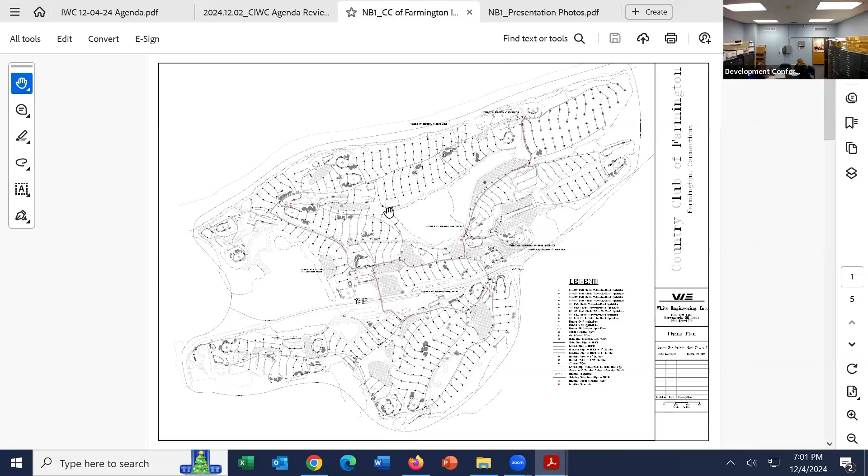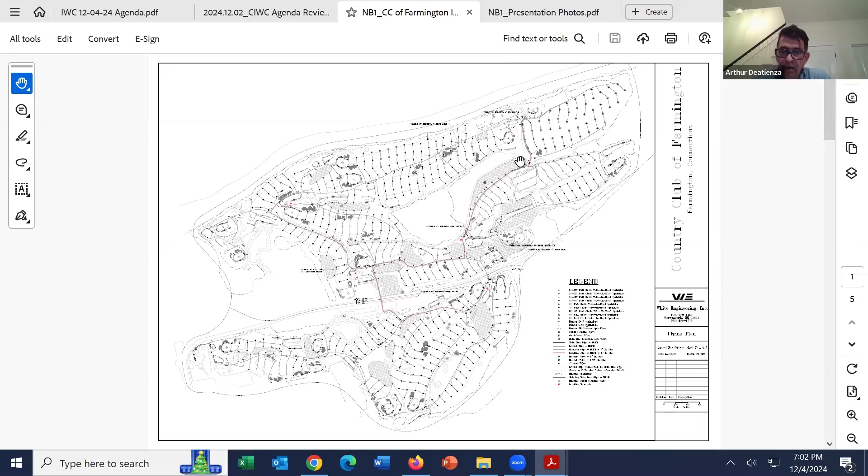So we're just here to revisit some of the questions that were asked about the footage. On the river side of the road, there is approximately 16,600 linear feet of mainline piping that would require open trench excavation. About 3,400 feet of it travels together, you can see two lines traveling together along 15 and down towards the river. For that 3,400 feet, one trench will accommodate both lines, and that's the majority of the big pipe on that side of the road. The rest is all 4-inch, pretty much, with the exception of a little bit of 6-inch existing pipe on that dotted line that we'll reuse.

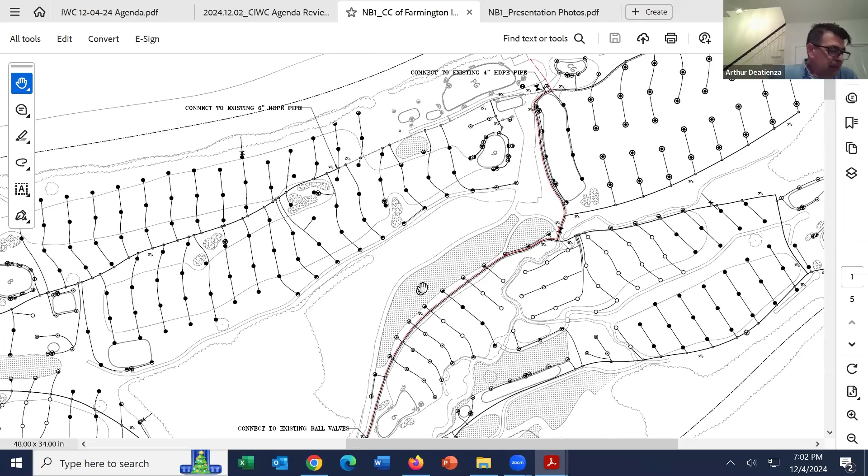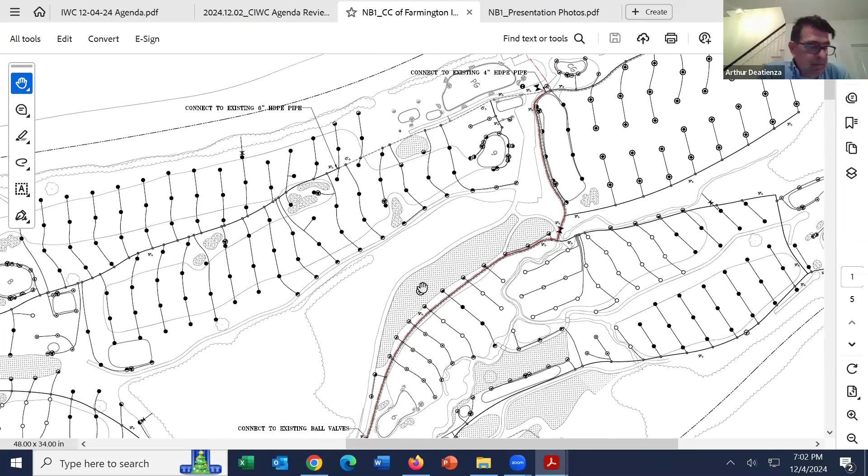Then there's about 30,000 feet of 2-inch piping that would be installed using a vibratory plow, so that's not going to have an open trench. I don't know if you remember the pictures of that process, but it looks like a little incision through the turf. That's the open trench, and then that's the vibratory plow. So we'll dig a start hole, and then you'll see the little incision going across, and then we'll hand dig for the sprinkler heads that go on that.

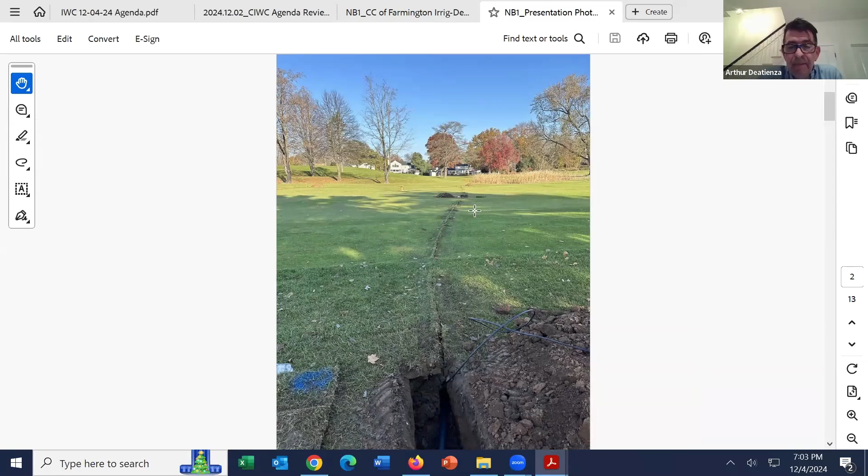And then for the stream crossings, or the drainage swales, I should say, they're about 20 feet on average across, about 18 inches wide. So in total, with the 5 crossings, we estimate that to be about 150 square feet of disturbance through there, and that'll all get restored to exactly the way it looks right now.

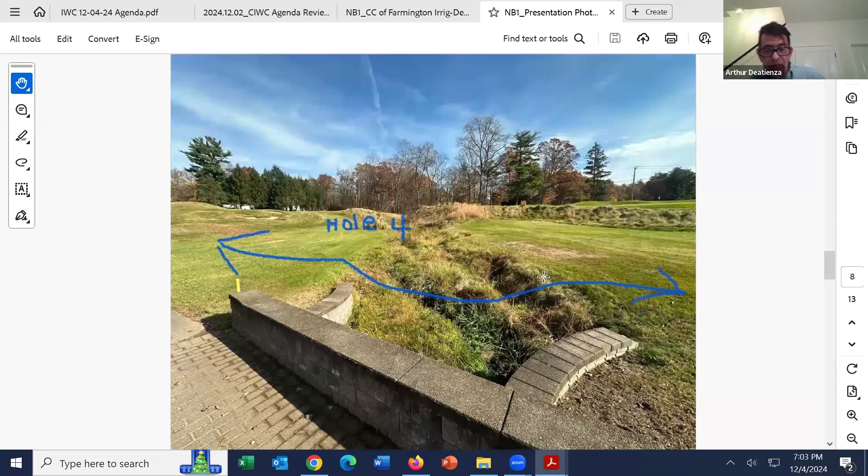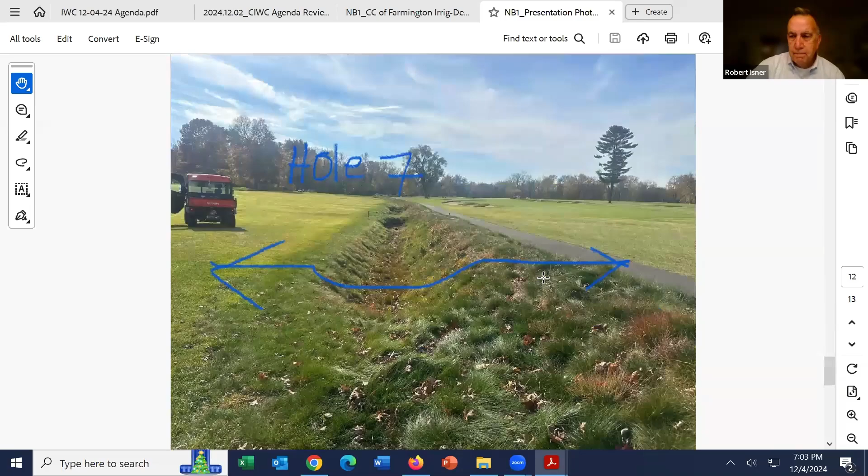Thank you, Art. Is that the end of your presentation? Unless there's any other questions or anything that you need, that's really all that I have.

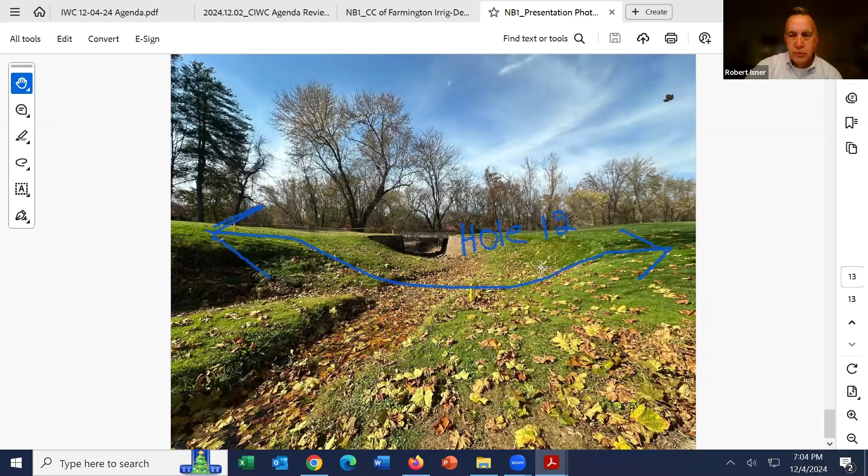Okay, we'll go around and check with commissioners to see if there's any questions. And before I go around, schedule-wise, I guess it's good that there aren't any golfers out on the course right now. Is the winter going to create any problems schedule-wise? I hope not, as long as the weather stays reasonable so that we can be in the ground. The weather, we were wetter now than we were, sadly, but there's still no water in any of them to speak of. But we would like to get that big pipe in as quickly as possible, just given the fact that I've seen it underwater so many times before. I would like to get out of that wet area as quickly as we can.

Thank you. I'll go around and check with the commissioners to see if there's any questions, starting with Commissioner Berlandi. No, I don't have any questions. Thank you. Commissioner Kelsey? Nothing from me. Commissioner Simons? I have no questions. Okay, Commissioner Simpson? No questions.

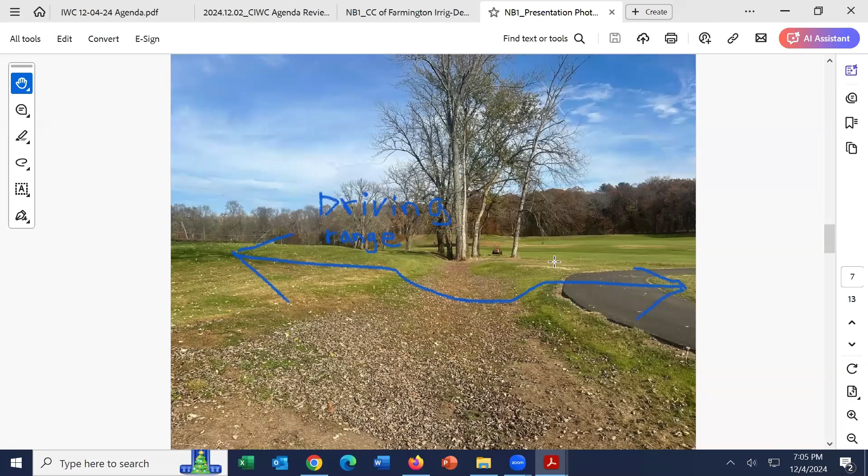And Commissioner Tulin? I don't have any questions, but if the course was open, I am a golfer and I would be happy to go play, but I don't have any questions. Could do an inspection, you know. Okay, maybe so, next spring we'll see.

With that said, I think it'd be appropriate, and there's no expressed concerns, other than the fact that the scope of the project did require the application. I would gather the sense would be a motion to approve with the conditions that work occur during low flow periods when possible, and to keep the staff apprised. Is there a motion of that nature or otherwise?

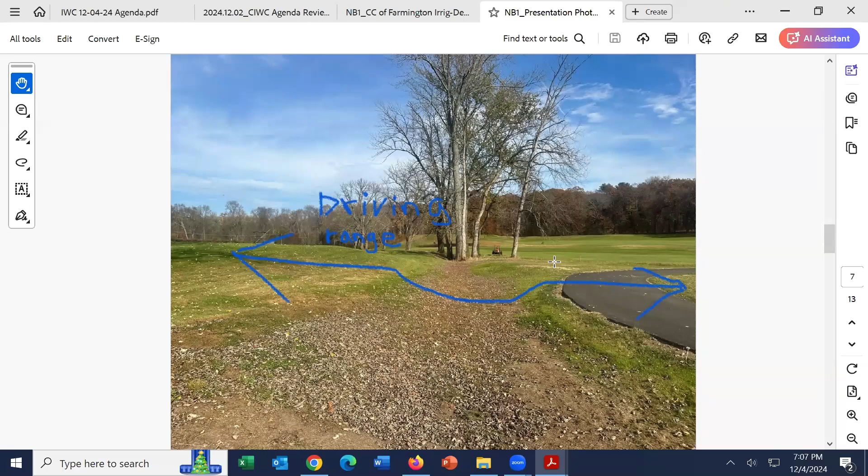Seconded by Rich. All those in favor signify by saying aye. Aye. Opposed? Motion carries.

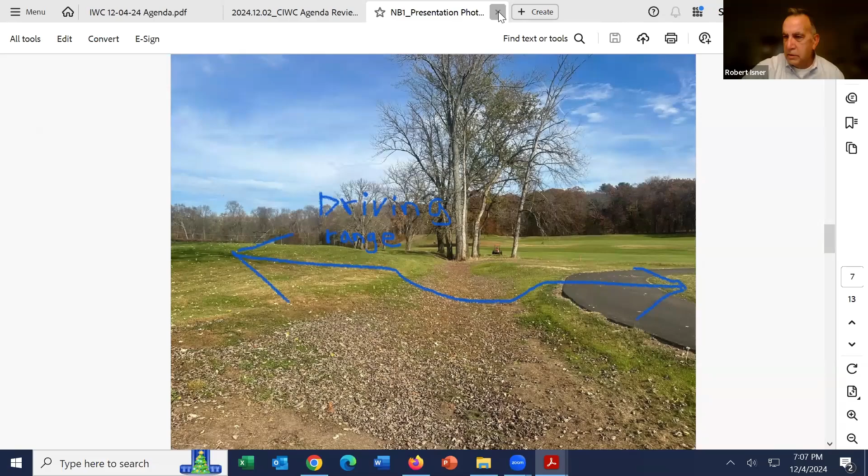Moving on to item number 2, Tunxis Country Club, 87 Town Farm Road.

Is there someone present? Yes. I was struggling with the mute button. Yeah, just trying to turn on my camera quickly.

Good evening, my name is Matthew Gustafson. I'm a Connecticut registered soil scientist with All Points Technology. I'm here on behalf of Tunxis Country Club for a determination of unregulated or non-regulated activity associated with a maintenance plan for Poplar Swamp Brook.

I believe we have Albert Tomaso with us tonight, who is the owner and operator, who would like to say a few words before we get started. Albert, are you here? Yes, he is. Okay, let me just bring him over. He was in the... I think I saw him pop in as the attendee.

There you go. All right, Albert, you should be all set to talk. Thank you, Bruce, can you hear me?

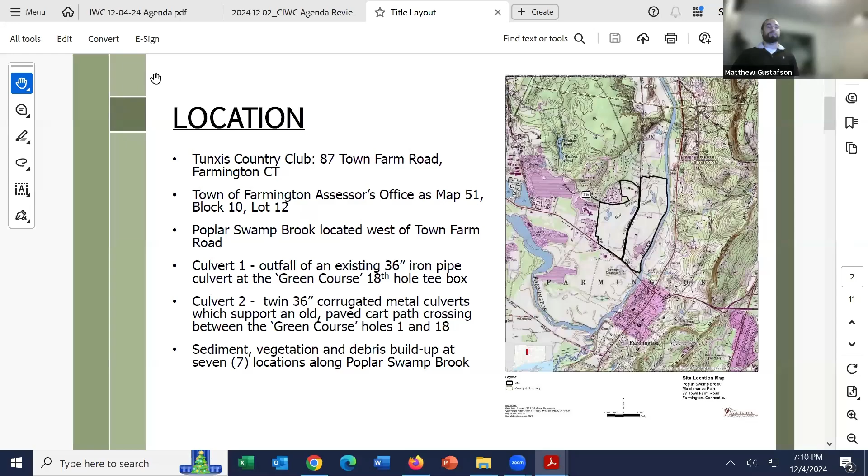A bit of backstory that generated this individual project: All Points Technology was engaged by Tunxis to map all of the wetlands, the regulated resources at the country club, with the intent of generating a management plan that encompasses all their routine maintenance activities that potentially would be regulated under the town's wetland regulations. As part of that, we assessed a couple of these culverted crossings as well as Poplar Swamp Brook.

The real purpose is that because of these conditions, both the culverts in disrepair as well as years of accumulation of sediment, it has resulted in exacerbated flooding conditions both within the stream as well as the country club courses, backing up all the way to the subdevelopment. So to alleviate that, we've developed this plan for restoration and maintenance.

Again, we'll be seeking a determination that this is all considered non-regulated activities, as they are entirely maintenance level activities consisting of removal of sediment and repair or removal of said culverts, as well as repairs of some of the cart paths. You can go to the next slide, please.

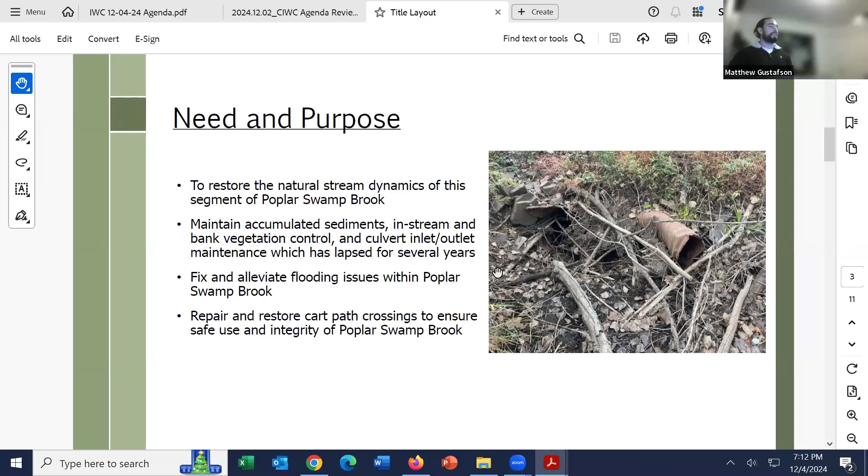Obviously, our project is proposing removal of material, in this case sediment deposition, as well as alteration in the case of removal of the culvert. However, the key qualifier here is both of those activities actually bring the stream back into a native and natural function of the stream rather than alteration of the stream. So that's how we see the interpretation of this particular regulation, and we feel that we fit under this interpretation. If you can go to the next slide, please.

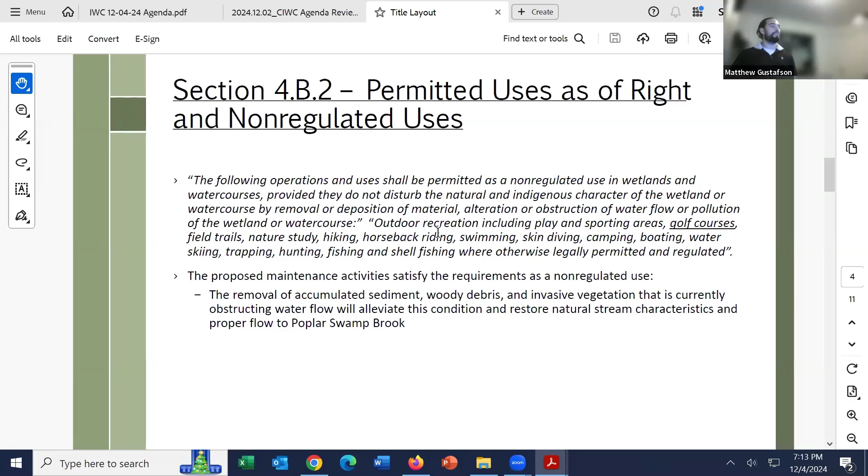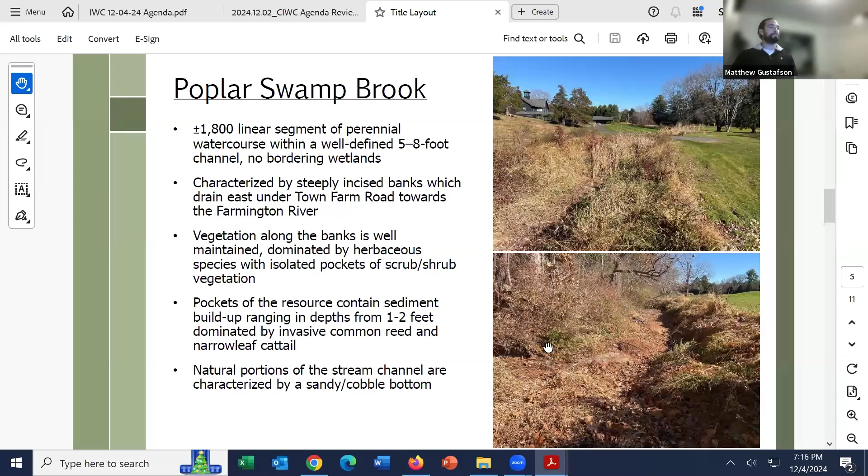If you don't mind going to the next slide. This is the general overview map for this portion of Poplar Swamp Brook. The key features here, the lime green shading that runs generally top to bottom in the middle of the map, is Poplar Swamp Brook, indicated by the blue label.

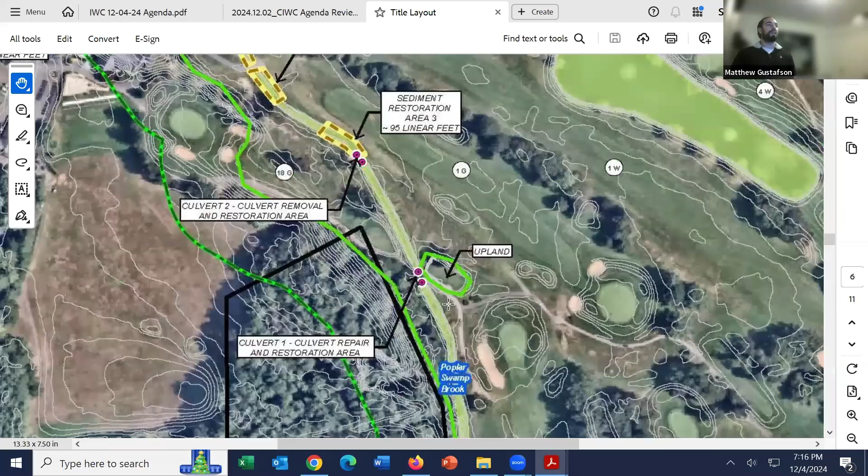Your two culvert crossings that are the subject of this determination, Culvert 1 and Culvert 2, are marked by the twin pink or purple points, centrally located. And all of these sediment restoration areas, all 7 of them, are identified by the yellow and brown dashed line polygons. As you can see, the sediment areas are generally spread out. I believe in the application materials you've received, we've gone into detail on each of the 7 locations, general depths of sediment deposit, extents, etc.

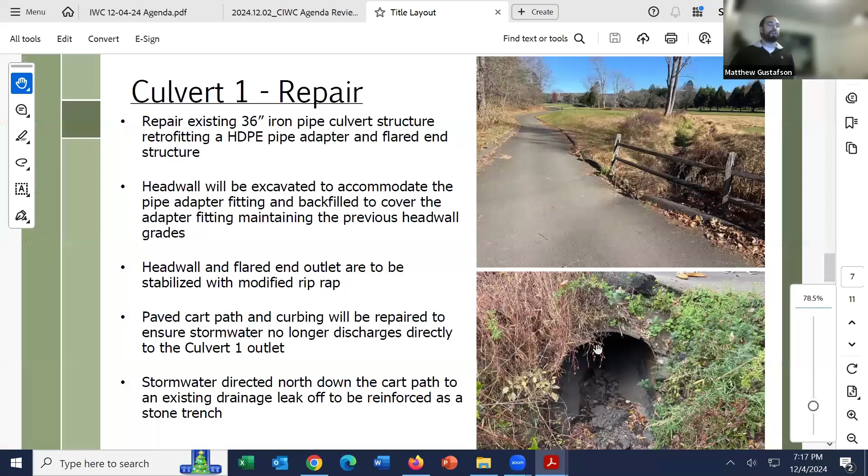You can go to the next slide, please. So we'll get into each of these three separate activities. The first being the Culvert 1 repair. This is the most substantial activity that we are proposing.

I'll start with the pictures on the right. As you look at the picture on the top right, you're looking north across the cart path crossing with Poplar Swamp Brook to the right. That right-hand side is the outfall to Poplar Swamp Brook. The bottom right-hand picture is the actual outfall in the culvert.

Some key things to note on these pictures, starting with the top: there's a bit of a depression on the right-hand side of the pavement on the cart path, as well as a large section of broken curbing in that area. Both of these are important because this has resulted in the problems we see in the culvert, in that stormwater accumulates on this curbing and is allowed to direct discharge to this head wall, which has resulted in erosion.

That head wall has started to wash out. It's resulted in some sediment buildup, as well as some of the asphalt and broken curbing that you can see in the bottom of that outfall side of the culvert.

The general plan, which I'll go into detail when we review the engineering schematic, is to repair the cart path and repair the curbing, which will divert water where it was historically supposed to be diverted, farther down the cart path to the north, or to the back of this photo.

If you can see on the back right-hand side, there's a natural curb break where water was supposed to be draining out. At that point, an under-drain type swale is proposed. It'll be washed stone topped with some topsoil and reseeded, allowing water to be both controlled and filtered before it's discharged to Poplar Swamp Brook.

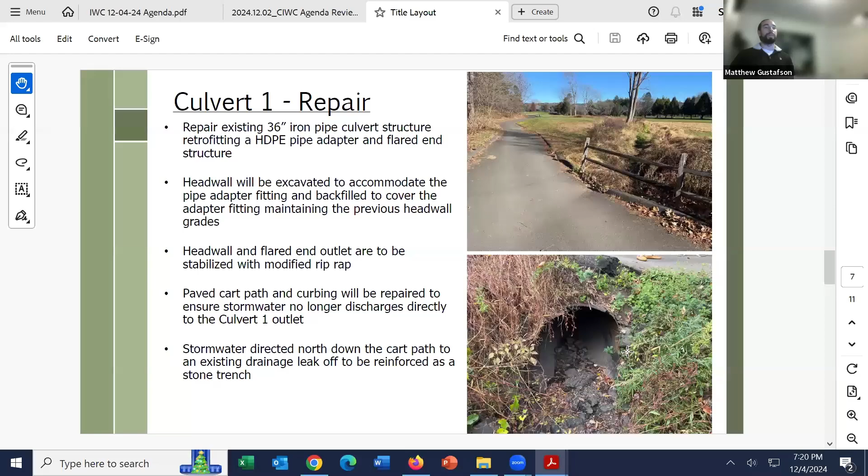And then the flared end outfall will be set into a little bit of that riprap at the bottom. If you can go to the next slide, please.

The second culvert is a little bit more straightforward. Again, we evaluated repair and/or replacement of this culvert. However, through our conversations with Tunxis, it was clear that they use this cart path fairly infrequently—it's solely used by maintenance staff.

So they volunteered that rather than keep this crossing and go through the process of repairing or replacing it, they would be amenable to, and what we're currently proposing, removing it and restoring the natural stream through this section. As you can see on the bottom left-hand picture, the inlet is in pretty severe disrepair.

The picture on your bottom right is actually the outlet section of one of the 36-inch pipes. You can see it's fully rotting out. So repair really wasn't an option, and replacement would be a significant activity within the stream.

So again, our plan is to entirely remove it through excavation—pull out the cart path, the overlying fill, removal of the culverts, as well as any underlying fill, which we expect would be underneath these culverts. The banks will be matched to the upstream and downstream side, as well as the stream bottom.

The one thing we are proposing, because we do expect to encounter fill below the culverts, is to over-excavate that fill out below the grades of the matching stream channel, and then replace that material with suitable stream bed material that we harvest from one of the stream restoration areas, which I'll go into more detail on in that section.

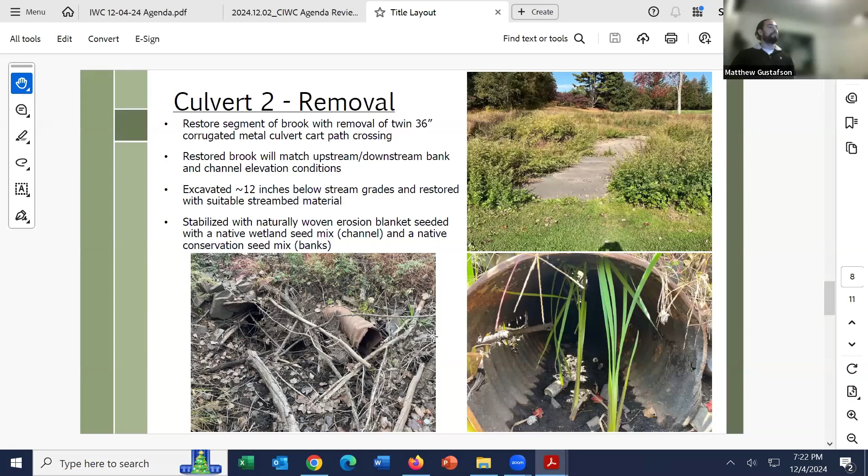So again, as I said before, all 7 locations of stream restoration are detailed in the submission materials. I'll go through the general approaches for all of them, as they are mostly similar in characteristics between all 7. Generally, the depths of sediment range from 6 inches to 2 feet.

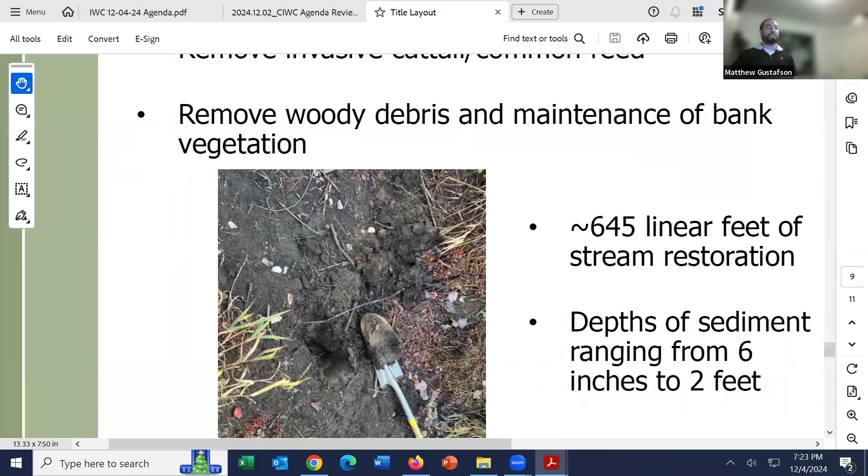A good indication of that is the picture on your bottom left, that's a spade, and you can see about 1.5 feet of that darker material. That's all sediment accumulation that's built up over the years. You can see as it lightens up at the bottom, that is some of your coarser natural stream bed material that you can see in other pictures we've shown, that was the old material that historically would have been exposed as your natural stream bed.

So our proposal is to remove all of that overlying material. In areas where it's causing a buildup of vegetation, we'll remove the substrate supporting that nuisance vegetation. But more importantly, it will remove some of the restrictions resulting in these flooding conditions. In addition, we are looking to remove and clean out the stream of any woody debris that has accumulated over the years.

Top right photo is a good example of the woody debris that we see. Because Tunxis isn't able to maintain that right side since it's off property, occasionally trees fall in. That log in the top right is a good example of something they'll be looking to clean out.

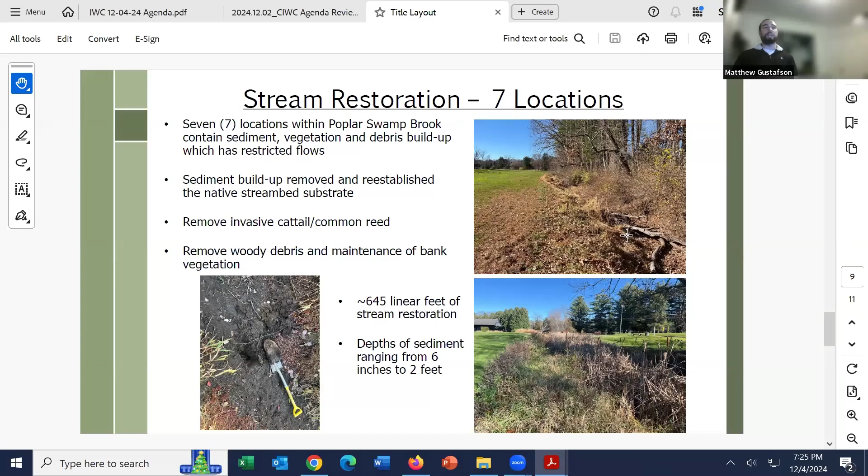While some of those features sometimes are good for stream function and value, unfortunately in the case of this stream, they eventually wash down into culverts and result in debris dams, which causes exacerbating flooding conditions. All these things result in flooding of the course, flooding of the pathways, destabilization of the crossings, all risking the use and safety of patrons on the course.

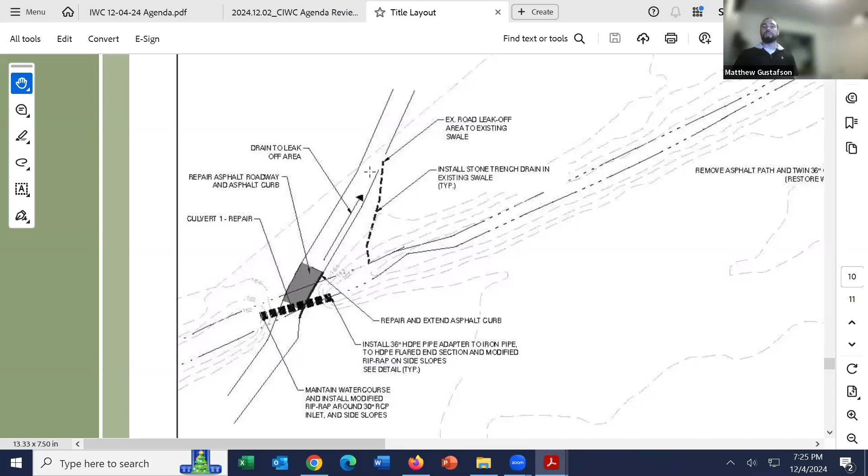I'll start with culvert 1 and quickly go through what we've already talked about, which is repair of the asphalt road, repair of the curbing, which would facilitate the removal of water to the north to the proposed road leak-off area, stabilized with a gravel under drain that will then discharge water back properly and controlled back to Poplar Swamp Brook, as well as the repair and fitting of the flared end, retrofitting of the flared end and connection at the outlet point.

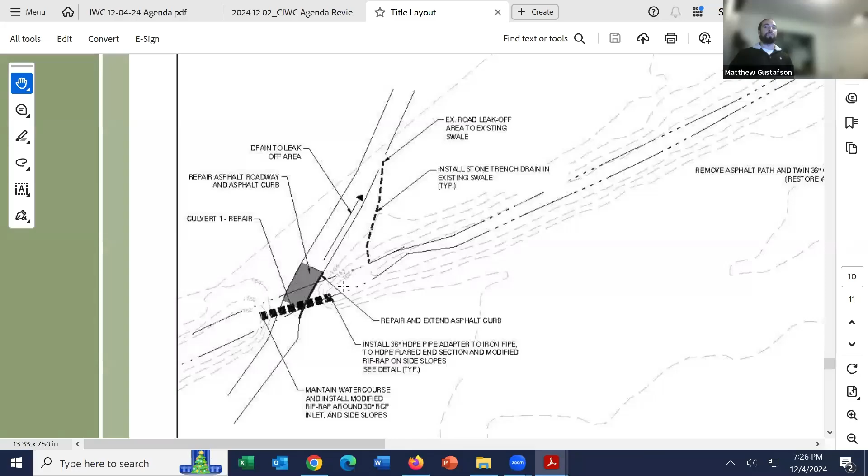The bottom, if you scroll down a little bit, Bruce, has the details for the culvert retrofitting. And if you scroll a little farther to the right, it gives you the detail on that stone trench drain, as well as the specs on the flared end section that will be retrofitted.

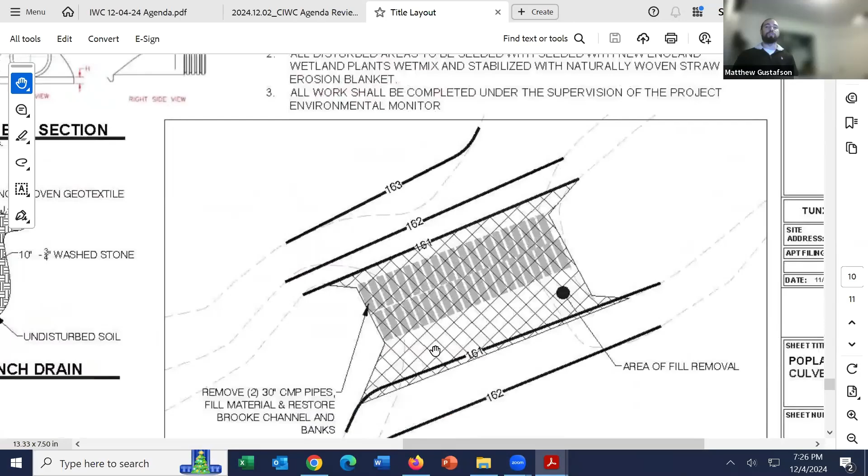Then if you move a little farther right, that is the detail or plan view for the second culvert crossing. This one's much simpler, strictly just removal of the crossing in its entirety and restoring the natural stream bed.

Tunxis is proposing this time of year specifically, and I think the last applicant may have mentioned this as well. We've been in an incredibly dry period. This stream has not been running any water. It's been dry for the last about 3 to 4 months. Despite the little bit of rain we've gotten recently, it's still dry.

So we're hopeful that this will be considered an unregulated or non-regulated activity, and approved tonight, so Tunxis can move quickly in December to make these repairs and this restoration and maintenance activities while the stream remains dry, before the eventual monsoon that we're going to catch back up with, that will come at some point in the future.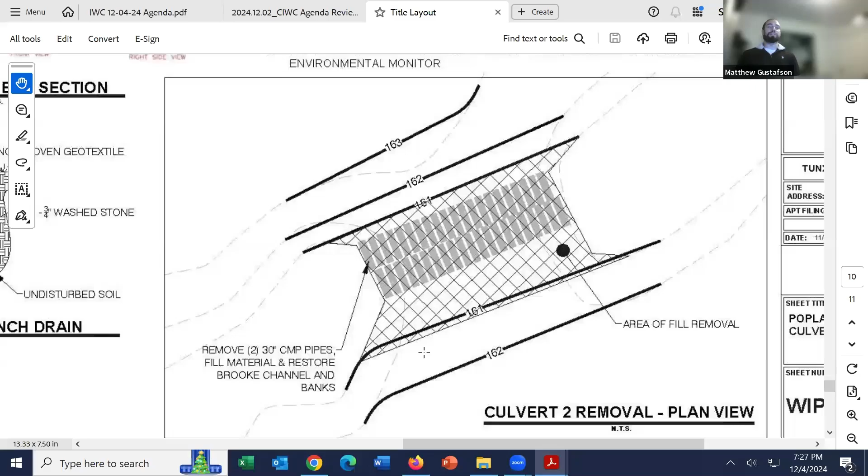Again, we consider this a non-regulated activity because these are all maintenance activities, and they specifically improve and enhance the natural condition of the stream and really bring it back into the condition it was supposed to be in, prior to the accumulation of sediments and some of the disrepair of the culvert crossings.

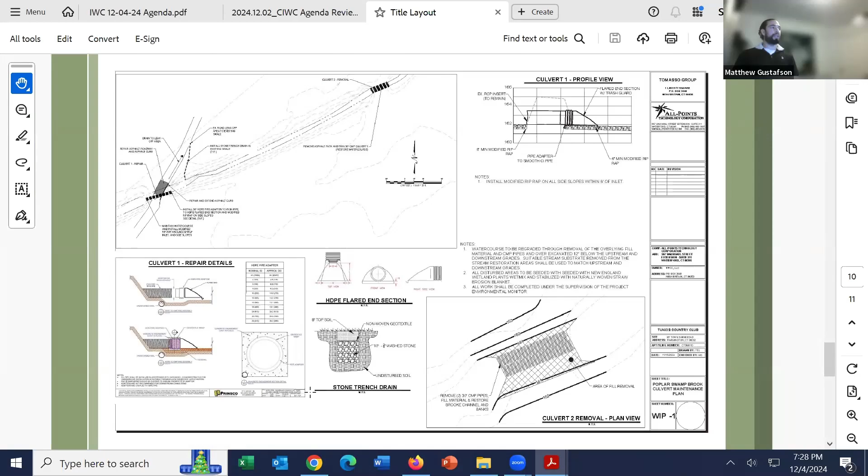And I think it's a very fair question to pose as to whether this falls under the exemption for use as of right.

And I will go around and poll the commission on that. I have a differing opinion, and you probably have a little skepticism, since the application immediately before yours was not all that different. While a golf course, I think the extent of the work and the fact that there is a fair amount of excavation and removal of material, as well as deposition going on, means it falls outside of what is allowed as of right for a golf course or other recreational entity.

I don't have any concern about the work that's going to be done. In the end, I think it's going to be beneficial for the golf course and the ecosystem at large. But I do think it falls within the regulated activity versus exempt.

And Bruce, if I may, and don't mean to interrupt you, if that is the position of the commission, we would request that the vegetation maintenance, specifically on the banks, the mowing, shrub removal, and some of that woody debris removal - I think that feels like it's more clearly within the maintenance exemption, if that could be separated out as a non-regulated use.

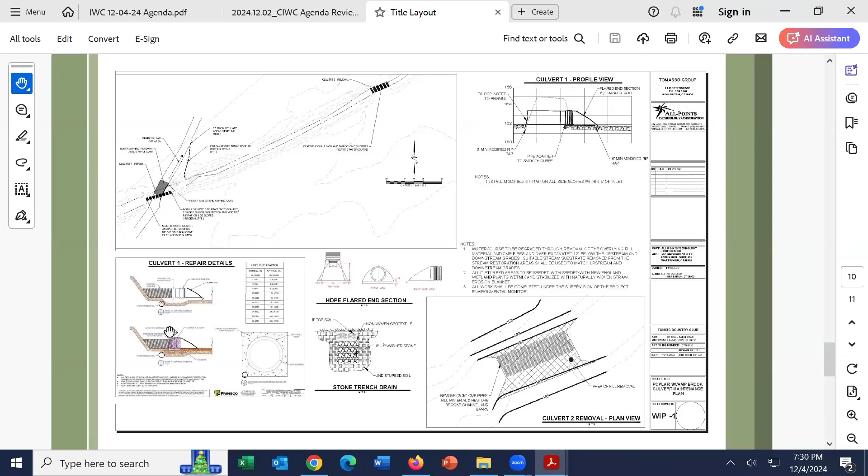I would agree with the position that you espoused there, Robert. And I don't have a problem with the applicant taking care of some of the vegetation and woody debris removal as of right. I had one question as to where they're proposing the culvert removal.

Was there a geotextile lining going to be put in there to protect the stream bed until the vegetation can establish itself? No, we are proposing a naturally woven erosion control blanket. It's similar to the synthetic ones you see.

However, synthetic ones commonly, or recently, have been found to have wildlife entanglement issues. The naturally woven ones are just as engineered to protect the surface and help establish vegetation, but they don't have that same wildlife entanglement issue. So that is our current proposal to stabilize the stream while vegetation establishes. Okay, that's all I have.

Thank you, Commissioner Kelsey. Thoughts on exempt or regulated? I guess I'd concur with your opinion and that of Commissioner Berlandi. And I think the area that I'm more concerned about is the second crossing where they're actually digging up and removing the culvert and the pipe. I think the first crossing is, in my mind at least, more aligned with maintenance and repair. It's the second crossing that I'm concerned about.

Thank you. Commissioner Simmons? Yes, I would also agree that it was the second one that kind of triggered to me at least that it should be a regulated activity for a portion of this, but I think the mowing and everything could be separated as well. I do agree with what has been said so far.

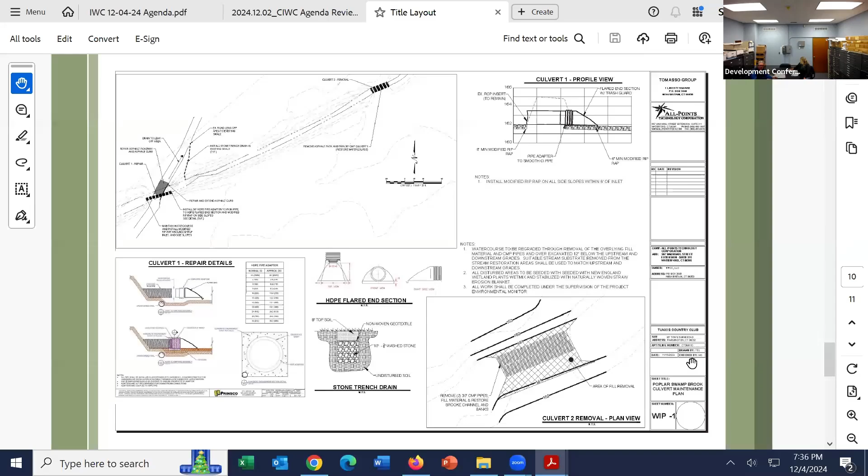Bruce, before I go around to the commission, do you have any input or guidance on the discussion? No, at this point I think it's kind of up to the commission. Culvert one, maybe the only one I have a little discussion on, it's not as much, I think they're only going back... what does it say on this? Oh, forgot how far back they're going.

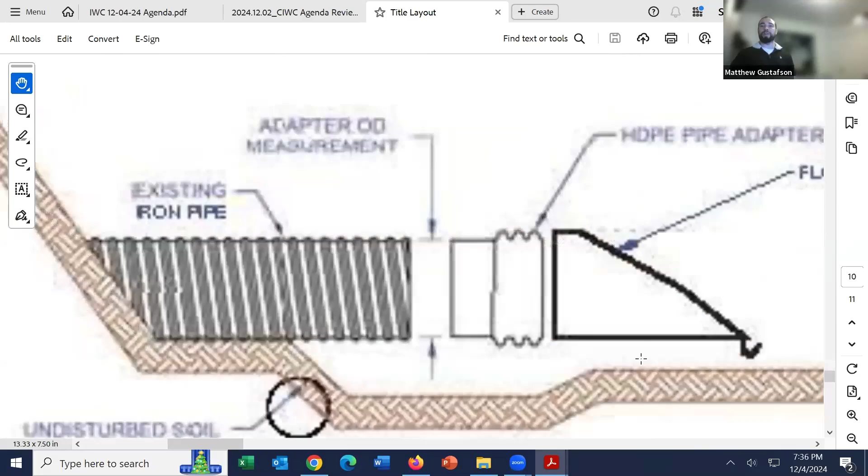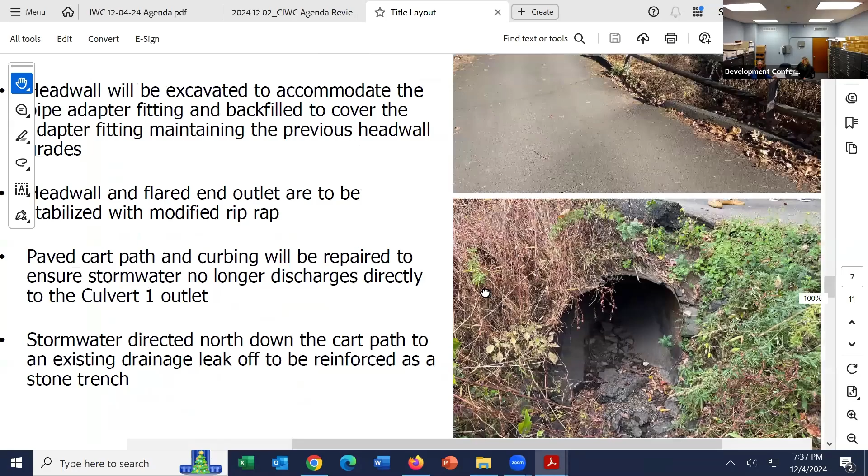It's not that long, they're just going to be cutting it back a little bit to slide this on. Yeah, I think it's about 12 to 18 inches, something in that range, a foot and a half, going back to there. So it's really not much, it's pretty much cleaning up around here, adding on that riprap extent, or adding on that culvert end, and then just backfilling this area up and cleaning it all up.

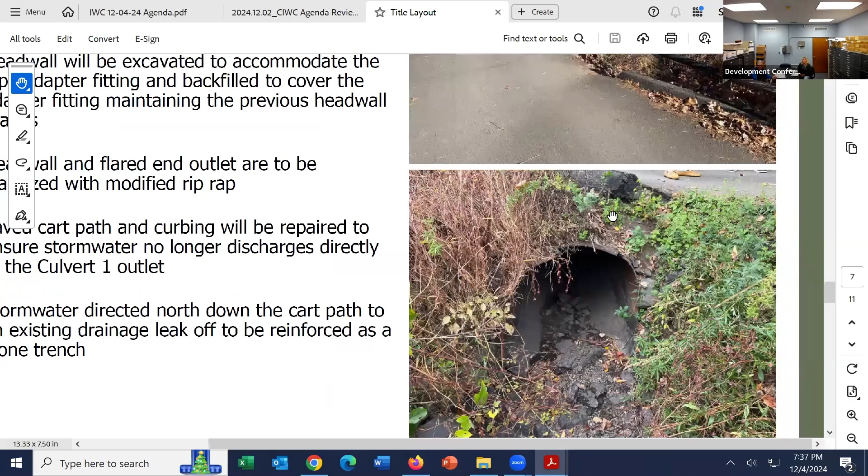So I think that could possibly fall under the maintenance, but I see your point on the other ones with the large amount of removal of sediment, with the removal of the pipes and on culvert two, I definitely do see that as a large amount of work. So okay, I'll go around and check with the commission.

I also think we need to determine if we want to do a site walk or not. I don't feel the need to do a site walk. I think the activities are pretty straightforward. We're also getting into a pretty tough time of year to plan and do a site walk. We don't have any time at the end of the workday and on weekends. It's going to be hit or miss with weather. Hopefully we don't have any major snowfalls, but that also will factor in, and then of course we do have some holidays coming up.

So I'll go around and get input from the rest of the commission on other activities besides the vegetative removal that could be under the exemption or regulated, and if you want to do a site walk. Rich, or Commissioner Berlandi, I'll start with you. I don't see the need for a site walk, and I would be okay with including the repairs to that one culvert outside of the application as maintenance. Okay, thank you. Commissioner Kelsey?

Yeah, I agree. And I've done plenty of site walks this summer through those areas and come up empty looking for my balls, but I don't see the need for any additional site walks for these projects. I do have a procedural question though, maybe for Bruce. Since the application includes all this activity, how do we, or can we parse this out into some of it is maintenance, some of it is not, or do we have to consider the application as a whole?

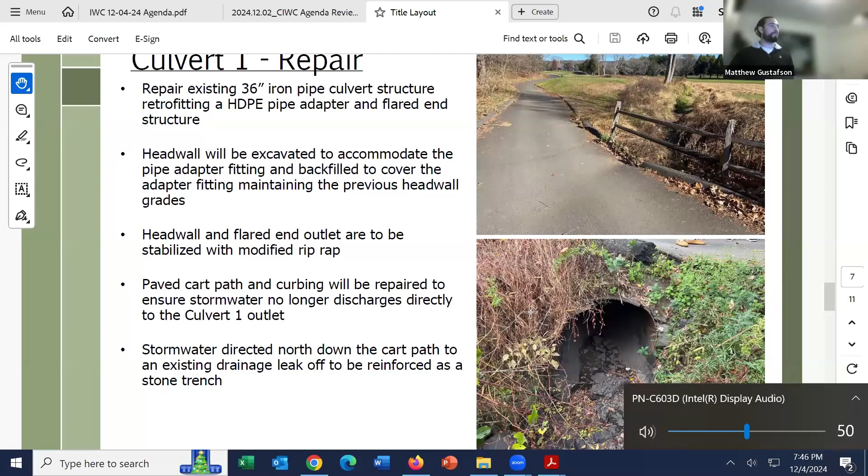Bruce, if I may, it may help some folks if we go back up to the sixth slide that has the overview map that shows all the activities, as again an overview. Right there, that one right there?

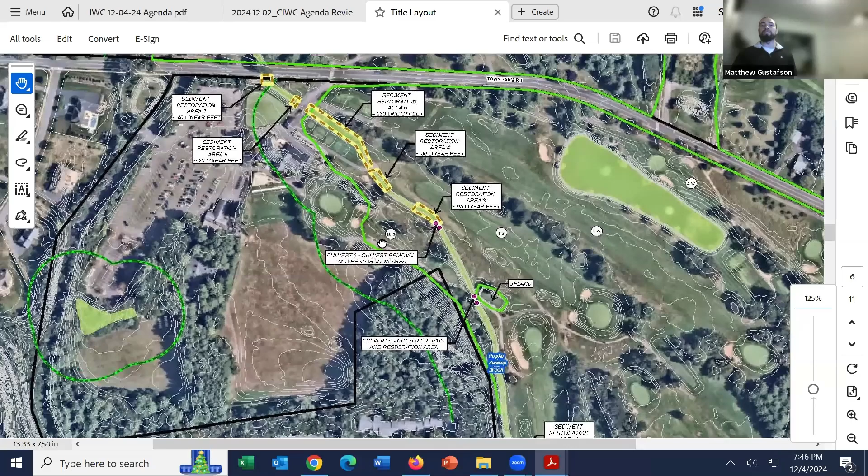Yep. Okay. Yeah, so I think, obviously from what I'm hearing, it seems like they're more or less in agreement that culvert one, which is the purple dots to the bottom of the page, to the middle, the lower ones, as well as all the areas in the yellow and brown dash polygons are being considered as non-regulated maintenance activities, as well as just the general bank mowing and debris removal, woody debris removal. And the exception to the non-regulated activity would be the culvert 2 removal, which would be the revised application. That would be a regulated activity.

But I don't know if that included the sediment removal in these areas though, right? I thought that was separate. I think they talked about the woody debris, but I don't want to speak for the commission. They can discuss. I thought it was the woody debris and the brush, but not the sediment removal in here. But I could be wrong.

Yeah Bruce, that's where I ended up. And again, we can go around and check with the commission and see if there were different opinions because I still am gonna, and I'm fine with the commission. If the majority of the vote is that culvert 1 activities are exempt, I'm fine with that, but I'm going to dissent on that aspect of the project.

So I'll quickly go around. I think that this sediment removal, some of it may be exempt, but some of it is regulated. So if we have to paint it with a single brush, I would say that the sediment removal is regulated. We'll go around quickly and seek the input from the rest of the commission. I'll go in reverse order this time. Jay, on the sediment removal, do you feel it's exempt or regulated?

I think it sounds like the consensus is that it was exempt, so I'm going to go along with that. I'm not really sure how to answer that, but I do have a procedural question. I'm still not sure. I'm going to just jump into what I'm thinking. The application, we're accepting an application, but if I understand this correctly, the way this conversation is playing out, we would be presumably accepting a modified application, or are we just accepting the application as is and then we'll sort it out?

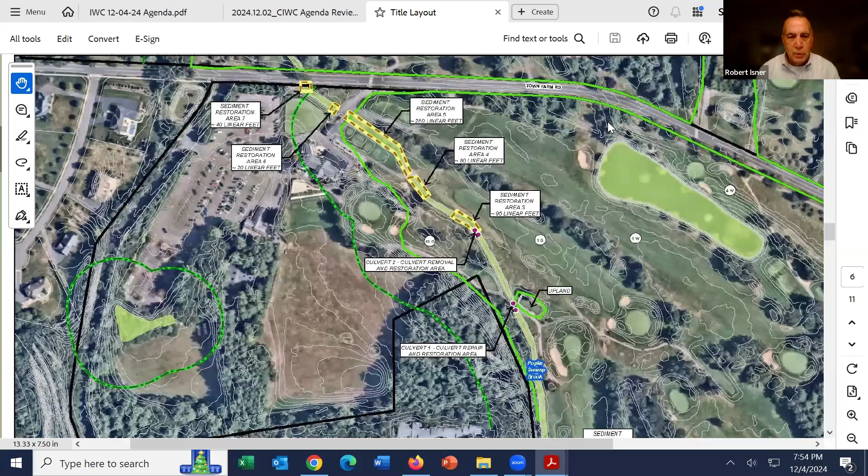Okay, so Matt and Albert, you can work with Bruce on modifying the application if you have any questions as to what was covered by our determination on what's exempt. I'll just follow up with Bruce.

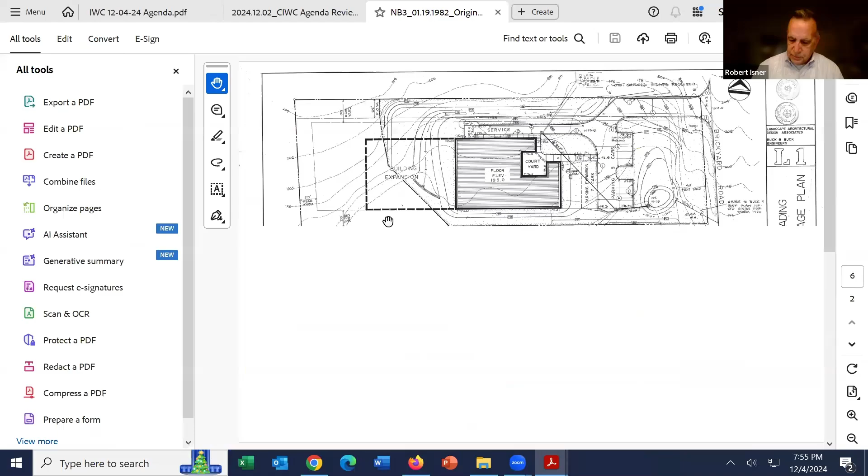That will bring us on to item number 3, Brick Farm LLC, 110 Brickyard Road. Yes.

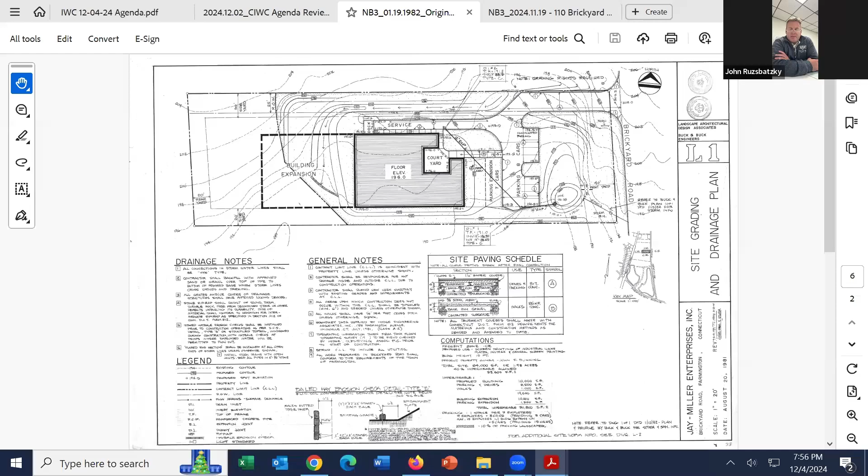We are requesting that the commission make a determination that seasonal maintenance of the on-site stormwater detention basin be permitted as a right and a non-regulated activity. The existing detention basin has become overgrown with invasive cattails, and sediment levels have risen to encroach the pipe outlets that discharge into the basin.

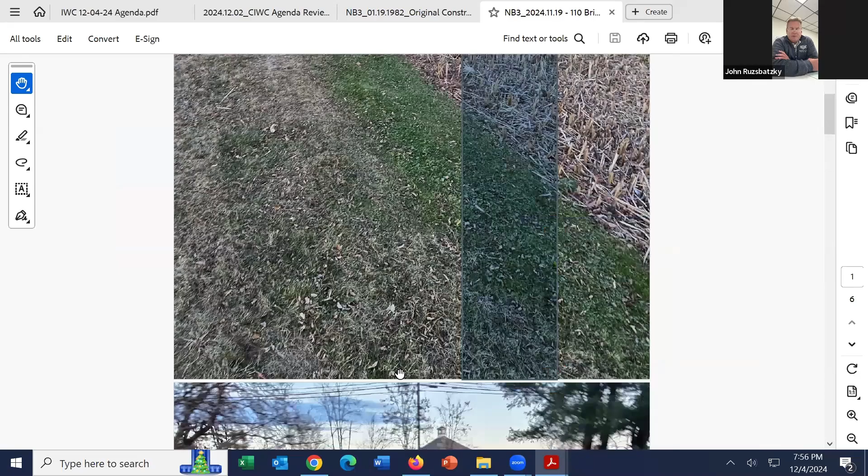Site photos were included in the narrative. Field observations were taken by town staff on November 20th, following discussions regarding our desire to perform maintenance activity. Observations included minimal standing water in the basin currently, and vegetative growth had been removed from a slight mowing procedure, with fragments of the left-behind vegetation taken out of the basin.

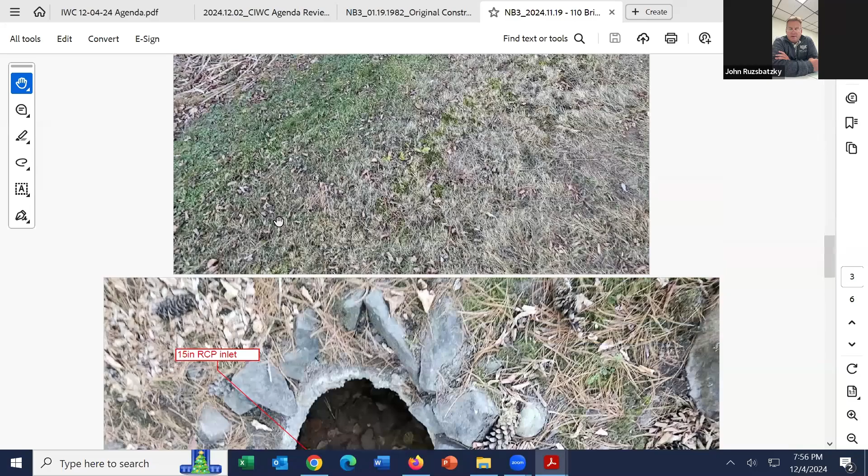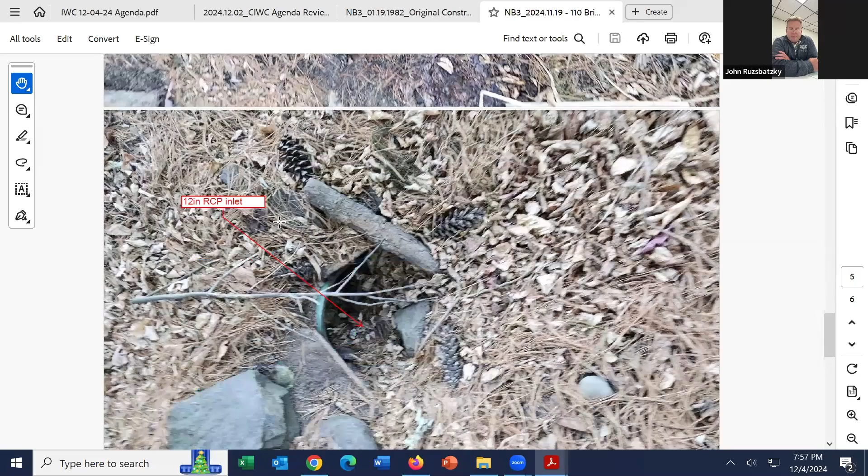The 15-inch RCP, which takes the majority of the parking lot water, has approximately 6 inches of sediment in the flared end. However, all the water has collected here, indicating that sediment in the pond is slightly higher. The 12-inch RCP outlet for the south side roof and the back parking lot is also under 6 inches of sediment, and the 8-inch PVC outlet to Brickyard Road is buried under some brush and stone.

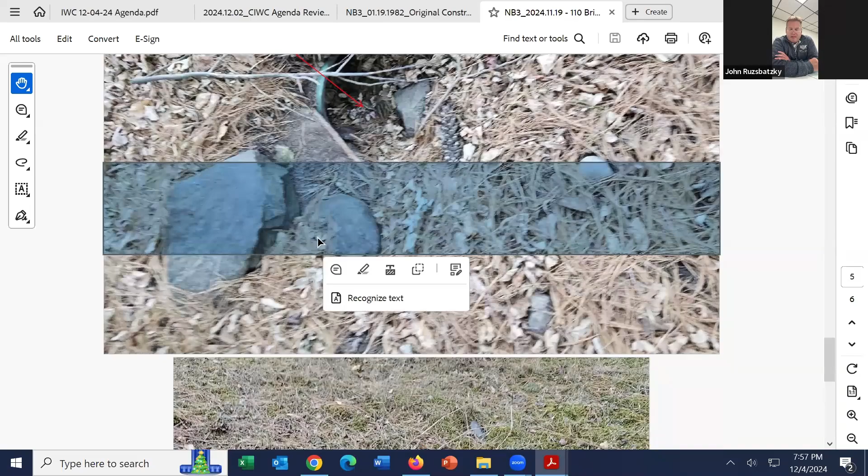The proposed activity is to be started this winter, with an expected duration of 1 week, to be restored upon completion. We will manually remove sediment from the outlets of the pipes discharging into the basin, clear brush and stone from the 8-inch PVC outlet on Brickyard Road, and protect that outlet with staked hay bales.

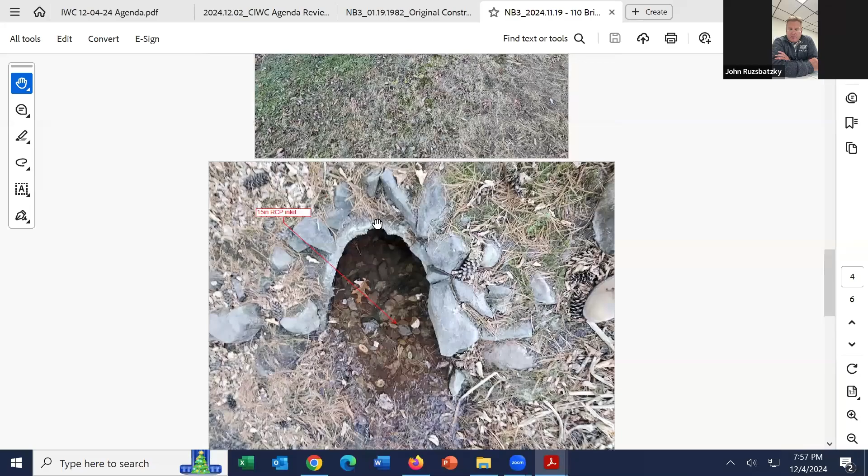Where cattails are encountered, soil will be removed with an excavator bucket, unearthing the cattail root mass. Soil will be recovered from the root mass, and cattails and root material will be placed in a container for off-site disposal. We'll remove approximately 8 inches of remaining sediment from the basin floor using a mini excavator with blade, to achieve a new base elevation of 186.6, allowing for approximately 2 inches below the pipe discharging into the basin. The basin floor will be restored with perennial ryegrass hydroseeding and wood fiber mulch.

We propose the ongoing seasonal maintenance activity as follows: mowing of the basin walls and floor when dry, biannual clearing of accumulated sediment and invasive species as required, and restoration of the basin floor by perennial ryegrass hydroseeding with wood fiber mulch and a slurry as required. If there are any questions, I'll turn it back to the commission.

John, thanks for that overview—and it's a good thing you're not a golf course, because I do think this falls within the scope of the exempt activity. The detention basin clearly requires maintenance in order to function, and by not maintaining it, it poses greater environmental harm. I'll poll the commission, but I think this is routine maintenance of a detention basin that really needs to be done. Unfortunately, too many owners of detention basins don't seek to do this. John, I appreciate you bringing this before the commission for a decision. I'll go around and poll the group, but I believe it meets the criteria of section 4.B.2 exemption.

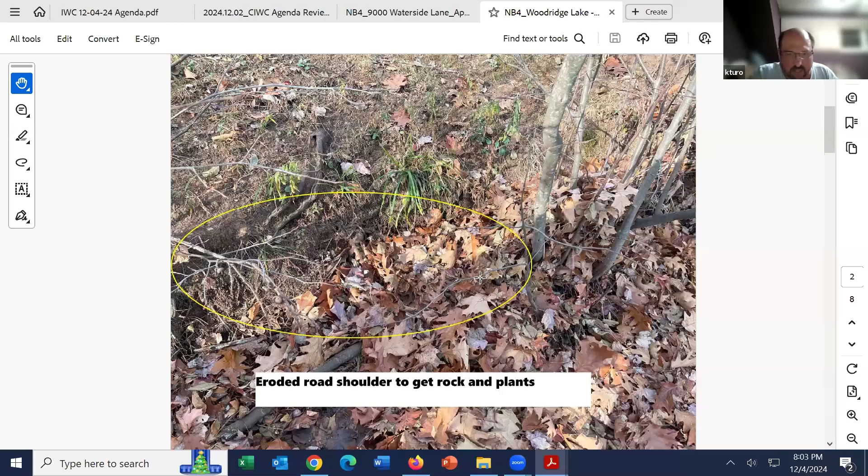I think I have another one showing that erosion. This is the only spot that any real removal of material is. I guess it was explained to me that children in the neighborhood came along and took the rocks from the pipe that connects the two lakes and threw it all in here to create a fishing access. They would like me to just pull that back and then plant this out.

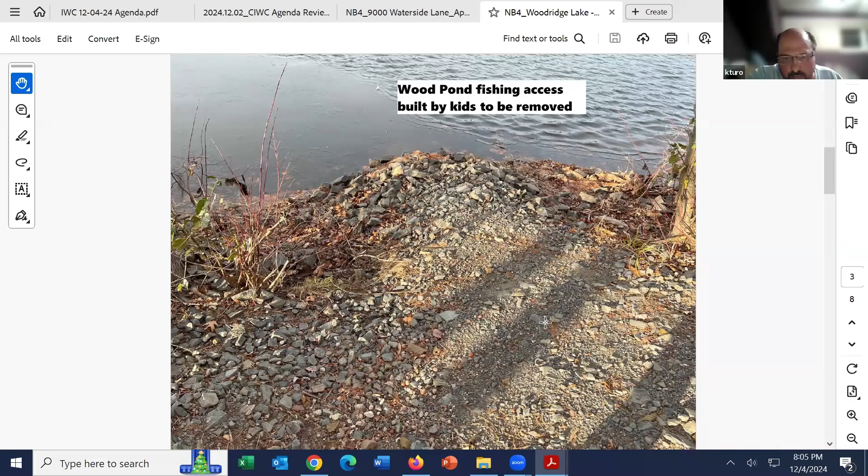So that's the only thing, the material is actually right on the wetland edge that would be in a regulated area. All the rest is in the upland review area, but I wanted to point that out. It's about 4 feet by maybe 3 feet, so it's a very small area, but that needs to get pulled back and then the vegetation placed back in there to establish that, to remove the material they placed in there.

Okay, and this is just showing you more open areas that we're gonna plant in line with the plants that are there, and use native plants to get a good rooted vegetation area to help protect the edge here, and some rock there to stop any more erosion. Okay, I think that covers that.

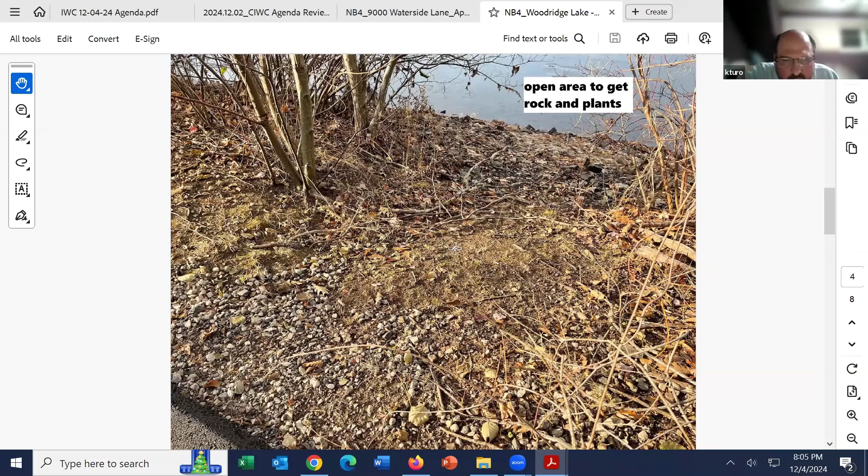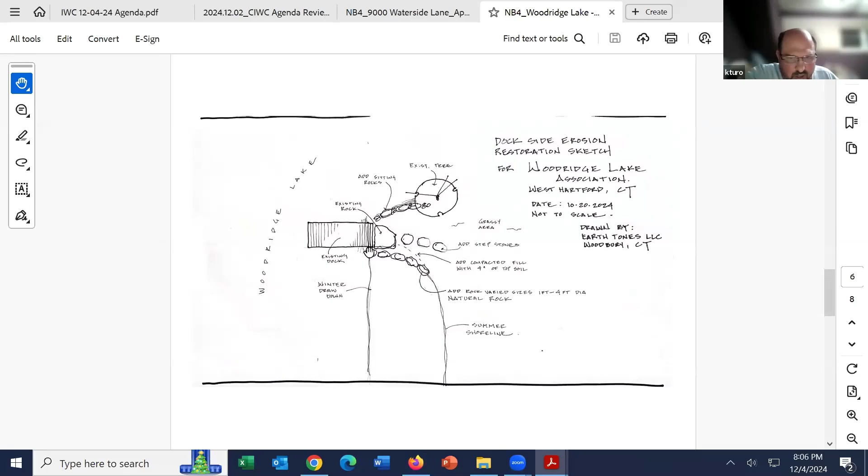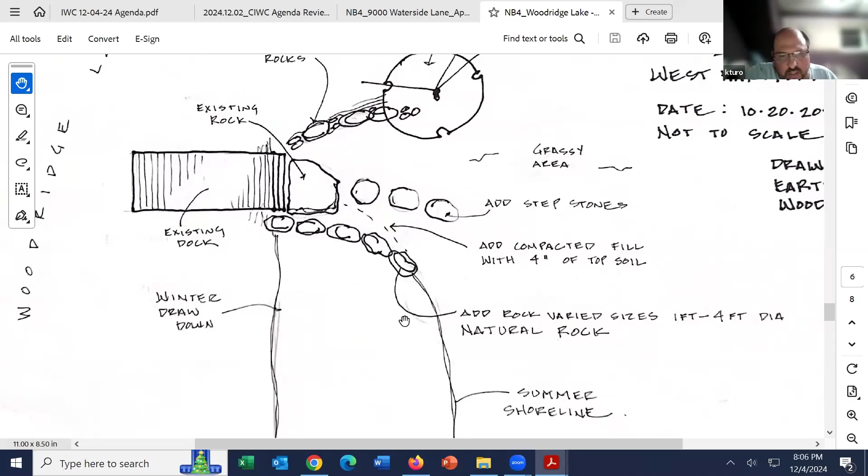Okay, Bruce, to the next one. Here's a sketch by our designer to show, there we go, that it's gonna go right to the edge of the dock here, or to the rock that's holding it. Put the rock in there, level this soil, and then add stepstones through the topsoil and keep this as grass. The stepstones are just there to keep the grass from getting trampled and subject to more erosion.

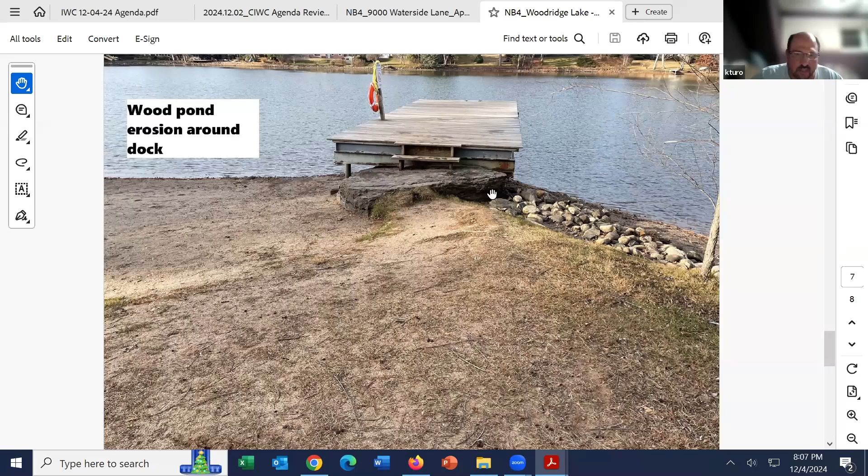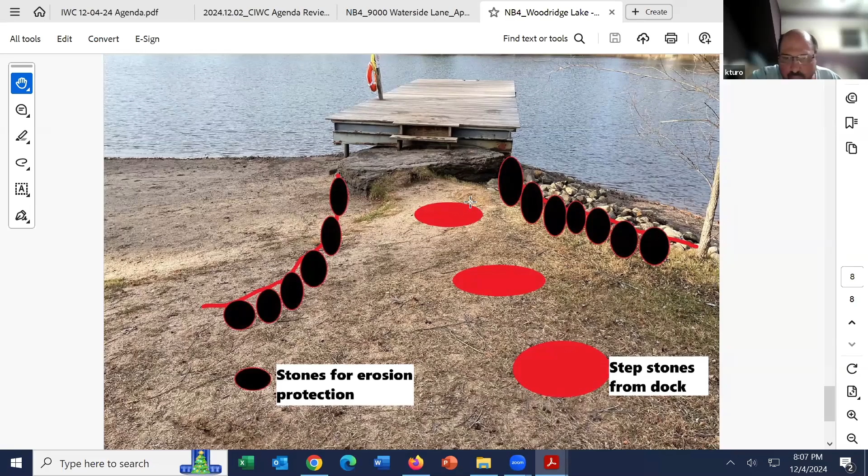And that is the extent of the proposed activity. That's just me playing with the computer to show about where the rocks are going to go there. And I think those were all my photos. Yep, that's everything.

Does the commission have any questions about this activity? Thank you, Kyle. Before we go around, Ed, did you have anything else to add on the application before we go around and poll the commission? No, nothing to add. I think we asked Kyle to propose remedies here, and so what you've seen is the remedies he has proposed. Great, thank you both.

So I will go around and get a sense from the commission. We can ask questions on the overall project, but also weigh in as to whether it falls within the exemption in section 4.b.2. Again, I only hold a single opinion, but I think the work falls outside of routine maintenance, while the project as presented would likely have an overall beneficial effect on the lake and the wetland area. I do think it falls within a regulated activity versus an exempt activity.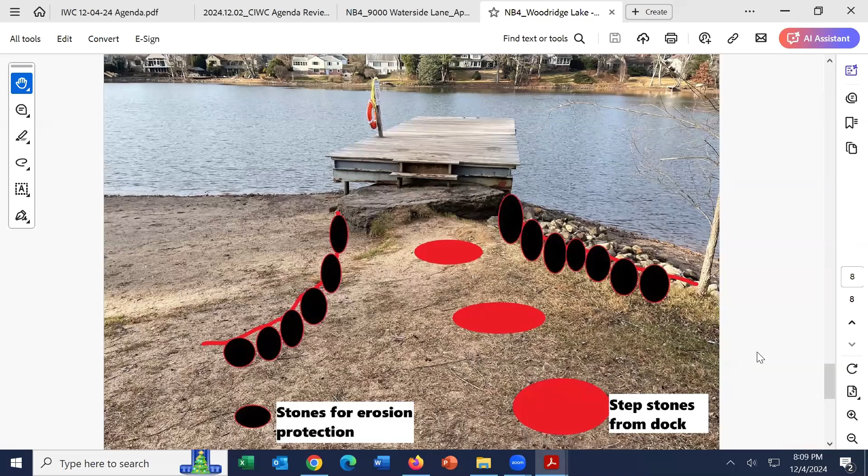And I will go around and poll the commission. So Commissioner Berlanti, any questions on status of exempt or regulated? I don't have any questions. The presentation was very good to identify what was going on. If it weren't for the dock, I could lean toward it being a non-regulated activity, but this work at the dock, I think, just puts the application over the edge. So I would entertain accepting an application.

Thank you. Commissioner Kelsey? Yeah, I agree in terms of the exempt versus non-exempt status. Question on the dock area that the picture is up right now - are you bringing material in, or just placing rocks? And if so, how much material? I know you said you're going to put grass seed down and everything, but will there be other material coming in? Yeah, topsoil will have to come back in.

That material isn't sufficient to be growing grass. So it's probably about 6 yards of topsoil, just so the grass has something to root into. That's primarily sand that's eroded from the left-hand side of that photo, pushed up there, so it's not growing soil - it's just not suitable to grow healthy grass. So 6 inches of topsoil to connect that. I would level the sand that's there, so it's an even layer of soil to support the grass.

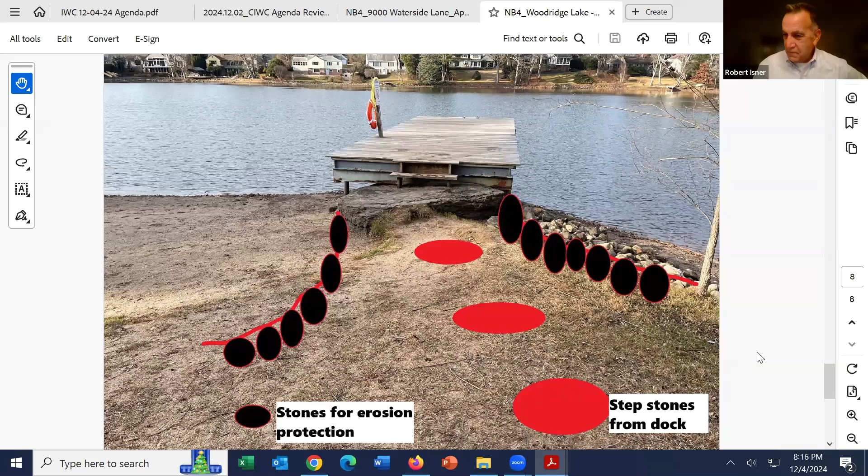Is there a motion to approve the minutes of November 6th, 2024? So move, Mark. Is there a second? Second. All those in favor signify by saying aye. Aye. Opposed?

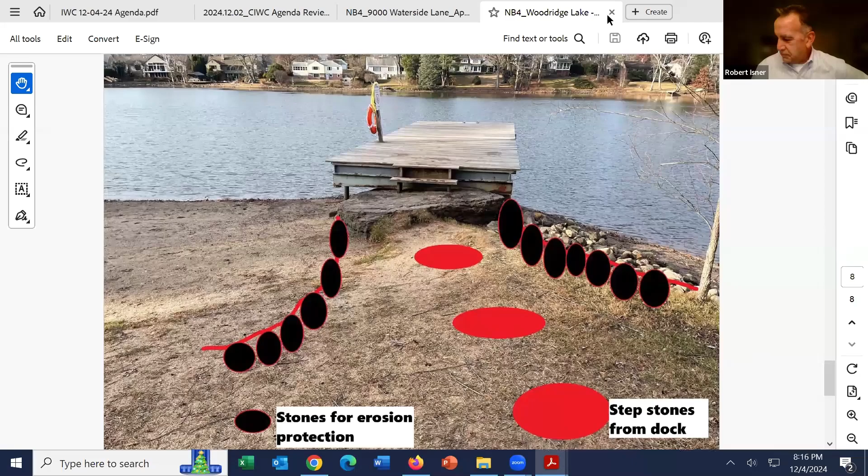Do I have to, Robert, I'm not sure if I was seated at the meeting. I don't remember, but I know that I left early. So do I need to abstain or not vote? No, if you participated and reviewed the minutes, you can still vote. Okay. I'm good, thank you. Okay, motion carries.

So we will adjourn the meeting. Yeah, Rob, if I could just bring one thing up relative to what we discussed, the New Britain Avenue stuff, 8556, that project from the last meeting. I don't know where we are on that, Bruce. But I've spent a lot of time on the bike trail recently.

At the last meeting, I expressed some concerns about a privacy fence, and I'd prefer to have some plantings there instead. If that's still a possibility, I'd ask the town to reconsider that as you work with the project. There's a shelf there, and if you look at the neighboring properties, there's stuff growing there—not necessarily 30, 40, 50 foot trees, but greenery, shrubs, arborvitaes that create enough of a buffer, I think. If you go down to the Connecticut property, which I'm familiar with, when we first put that bridge in and put that trail in, you could see everything down to the parking lot. But enough has grown there now, on a similarly shaped hill, that it's effectively blocked that view. I just think that's a lot better. With all the wildlife that goes through there—birds, eagles, owls—I wanted to express my disappointment with a privacy fence, and if there's any way to work with the applicant on other ways to buffer that, I'd appreciate it.

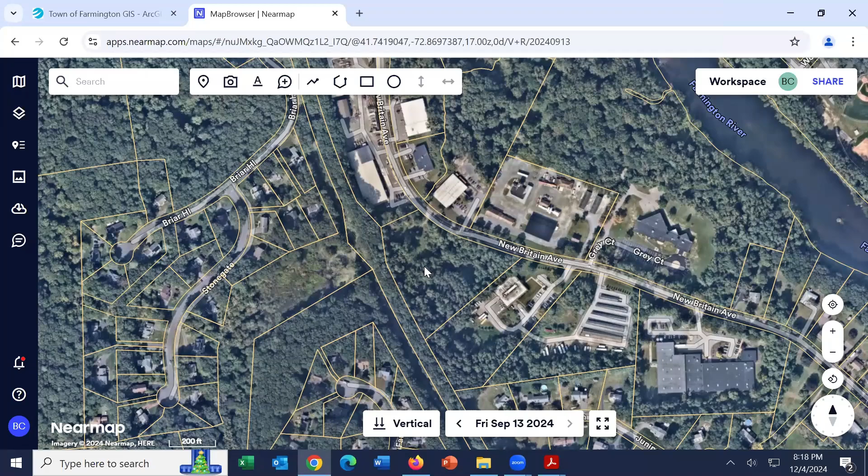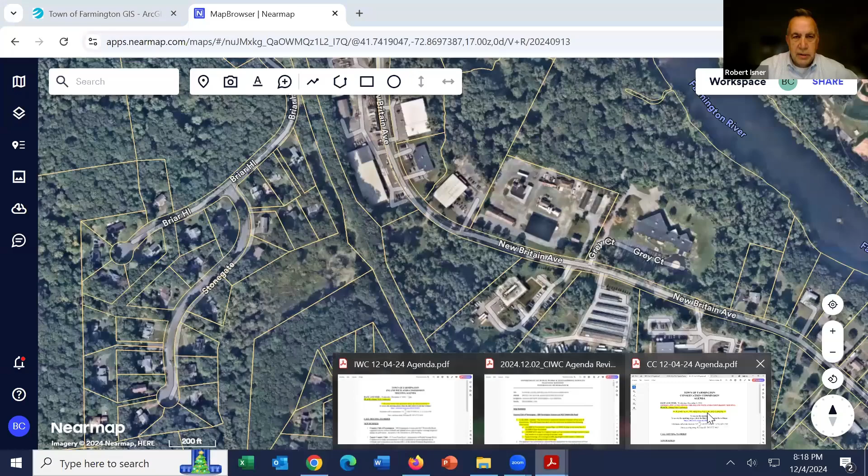Thank you, sir, for those comments. We will adjourn the meeting at 8:18, and we will concurrently open the Conservation Commission meeting at 8:18. Bruce, this looks like a very concise agenda, so unless there's anything to add, we'll move right to approval of minutes.

Is there a motion to approve the minutes for the Conservation Commission from November 6th, 2024? So move, Mark. Is there a second? Seconded. All those in favor signify by saying aye. Aye. Opposed? Okay, motion carries.